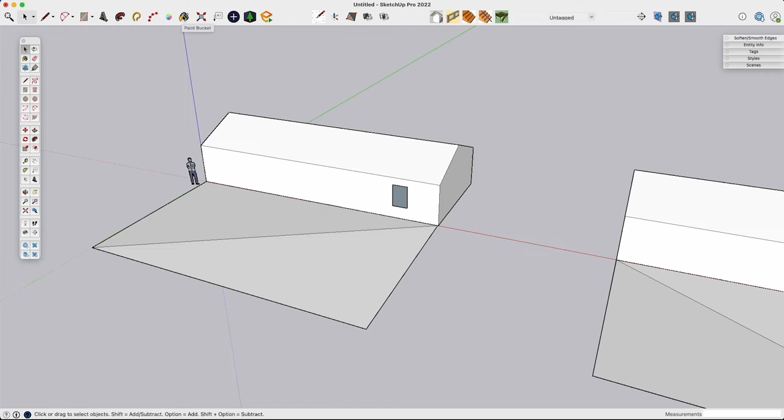We're going to talk about applying textures and colors to your model. For coloring, we can go to the paint bucket. We can also hit B, and that will bring up a tool palette in Mac. On Windows, there will be a nice tool palette. Okay, so the tool palette for the colors, let's start by painting the lawn with grass.

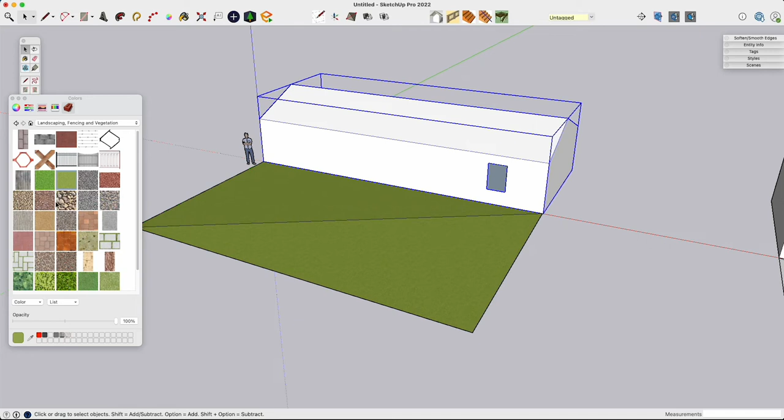So we'll select this. Now we can click these surfaces. Another way to do that is to select the surfaces, shift and select, and then you can paint them and it'll paint all of the selection. And finally, if it is a component and you select that material, so you want a rock house, it will paint all of the surfaces that are not already assigned a texture.

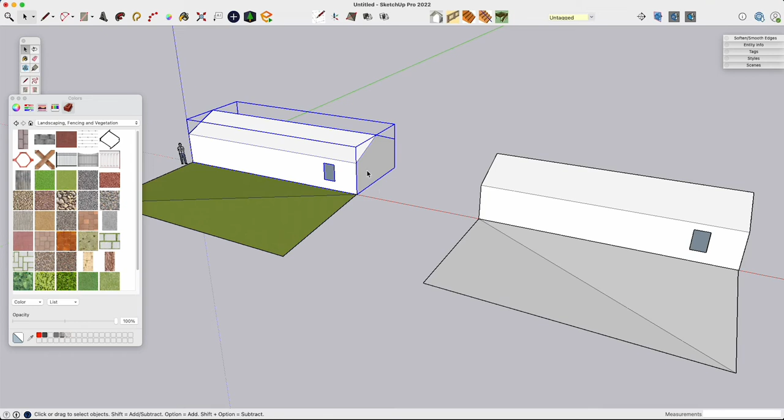Let's say I go, and then if we paint the component from the outside of the group, it will only change the color of that one component. Remember, the house is a component, so changes are reflected. But let's say I want the colors to be reflected in all the changes. Then we go into the house and we say we want a retaining wall. Now when you make a change to specific surfaces within the component and you get out of the component, now those changes will be reflected.

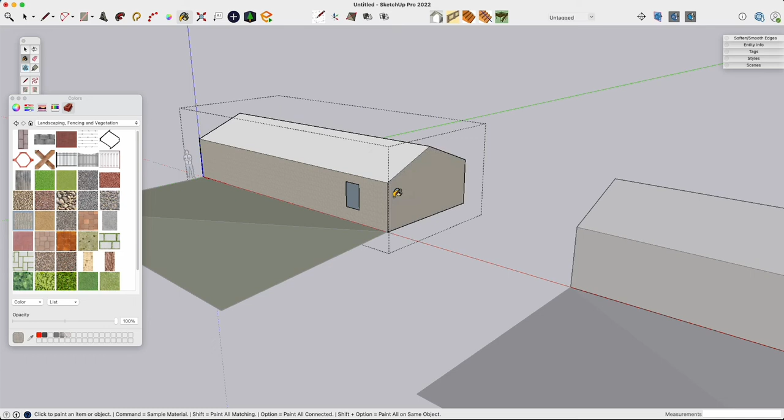So textures are applied to both surfaces and groups. So now that we've gone into the component and we've made the walls gravel, we hit space, we exit, we click outside of the group, we exit. Now we can select the shingles, and now when we color the group, it only colors the parts that are not already assigned a texture.

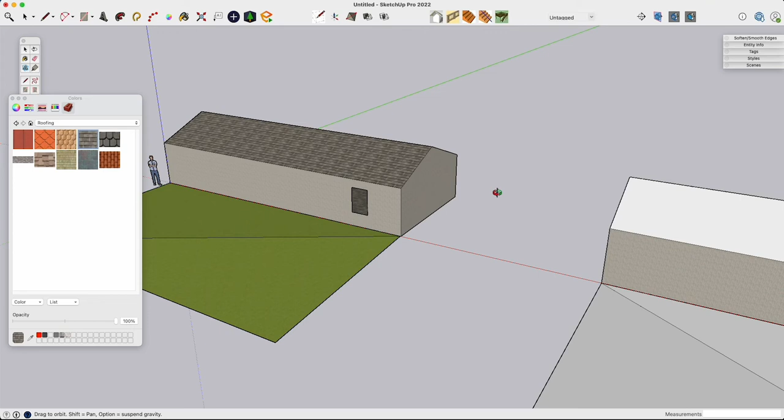So that could be a nice thing, like if you've got a pavilion and you want to change the colors of the stain, but the roof color is always going to be the same, you can build that model inside the component, color the roof, and then on the outside, go through your multiple different colors of stain without it changing the rest of the textures.

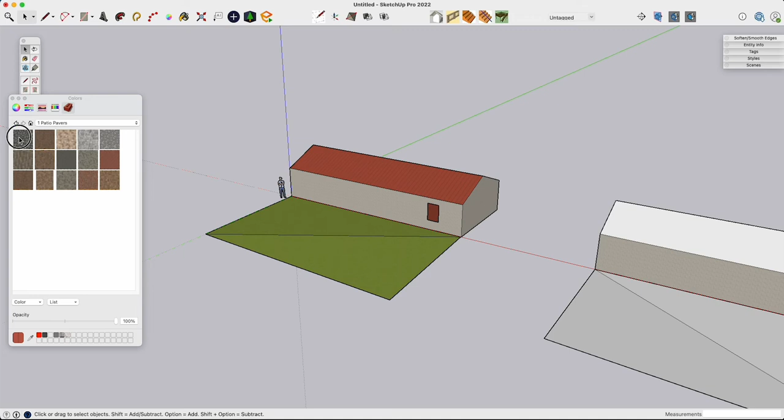You can add new textures. I've got a small library going here of, let's say, pavers. Let's say I want to use Belgian cobble. I can select this, or if I want to use Holland charcoal, I can select this Holland charcoal stone. And now I've got charcoal 4x8 in a herringbone.

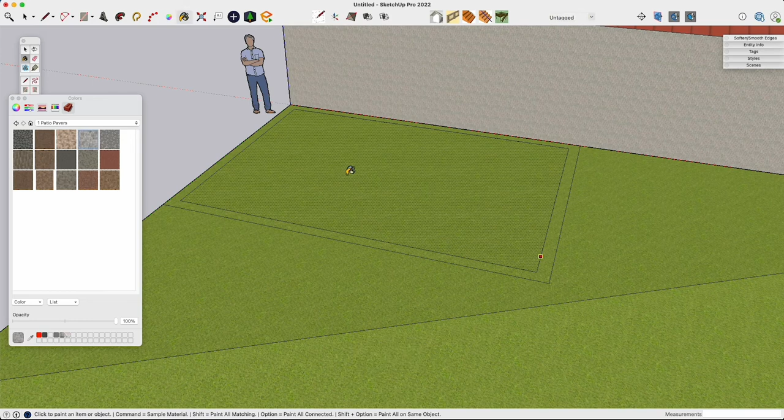That can be really helpful if I've got a patio on the house. You offset it 8 inches because it's an 8-inch block. Then you want the inside pattern to be something like Dimensions Scandina Gray. And then you want to use charcoal 4x8 for the border. And now you've got a patio pretty quickly.

Coloring your model can really bring it to life. And collecting and creating textures for your custom library can take a basic SketchUp program to a niche, specialized drafting program built just for your needs.

A lot of these textures, like Belgard and Unilock and Versa-Lok, can be found in the SketchUp 3D Warehouse, and other brands, like if you use Techo-Bloc, you can find them from the supplier, either from the website or from your Techo-Bloc rep. So search the internet. There's a lot out there when it comes to textures for SketchUp.